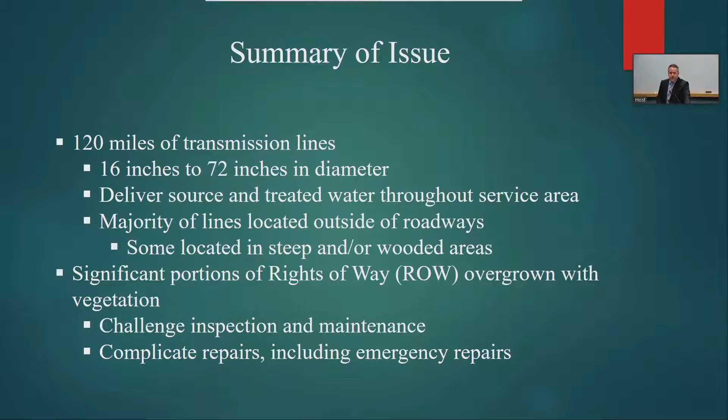Next slide please. So I kind of liken this slide to an angiogram, where you have your heart on the right and the arteries radiating out to the left. Our two east side treatment plants, Reservoir A Sly Park Water Treatment Plant, and Reservoir 1, Forebay Water Treatment Plant, are two raw water sources where our water is treated and then sent west. This is looking at our transmission lines from about the eastern boundary of our service area to about Bass Lake Road. You can see Bass Lake tanks 1 and 2 on the left. We're going to go through each one of these transmission lines, but as you can see, we cover quite a bit of terrain, elevation, and various different terrain types.

Next slide please. So I'll first introduce how we did this, and then we'll go through each one. I want to acknowledge Jan Wolf, our GIS specialist, and Rudenko, who spent a lot of hours on this. I get to just sit here and give you the summary results, and they did all the hard work. What we did was look at a 30 foot width, so 15 feet on each side of these main transmission lines, and using aerial photography and GIS analysis, we were able to look at the status of vegetation over each of these. The 30 foot is a general surrogate to the right-of-way, obviously over 120 miles, with various different types of rights-of-way. A lot of these lines were constructed by the Bureau of Reclamation, so the nature of them is a little different than our traditional right-of-ways these days. But this just gives us a good snapshot picture.

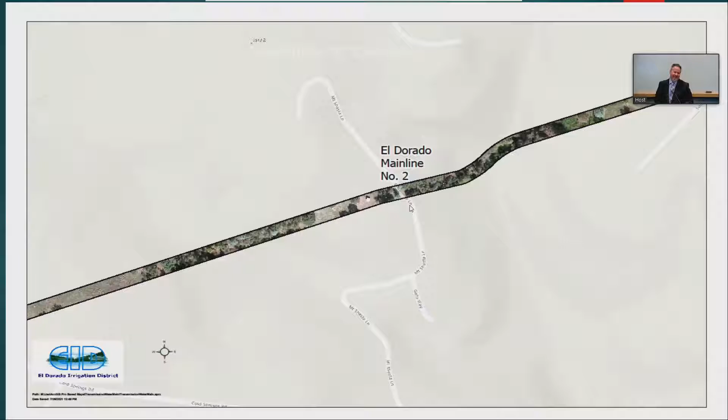So the next slide just shows the results of some of that GIS analysis. Each of these little polygons are summed up by transmission main, and we'll give you some of the acreages. This is just the best way to give us an approximate scope of work. As I said, it's going to vary parcel by parcel, but this gives us a good snapshot.

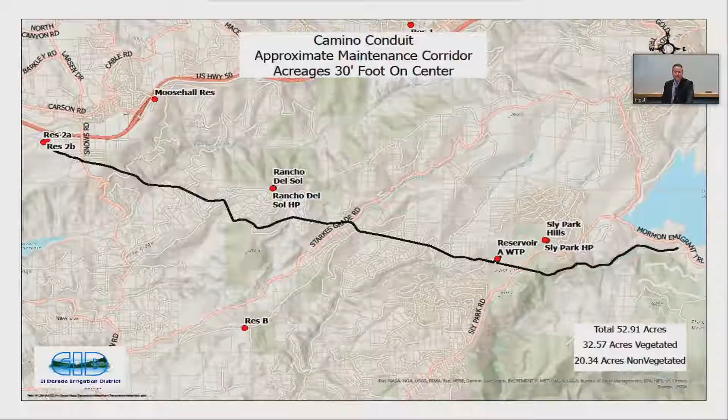Next one is the Pleasant Oak main. From Reservoir A we took water across to Reservoir 2A and 2B to bring water down the north side of Highway 50. This is how we bring treated water down the south side of Highway 50.

So again, Reservoir A water treatment plant, and then our covered reservoirs roughly following Stark's Grade, eventually into Pleasant Valley Road, down just downstream of the Sly Park Road confluence there, E16. Then Res B, Res C, and this transmission line ends at Tank 7, which is our in-conduit hydroelectric facility. We have about 77 acres, and about half of that is vegetated.

So we start to get into that transition oak woodland from the coniferous forest here.

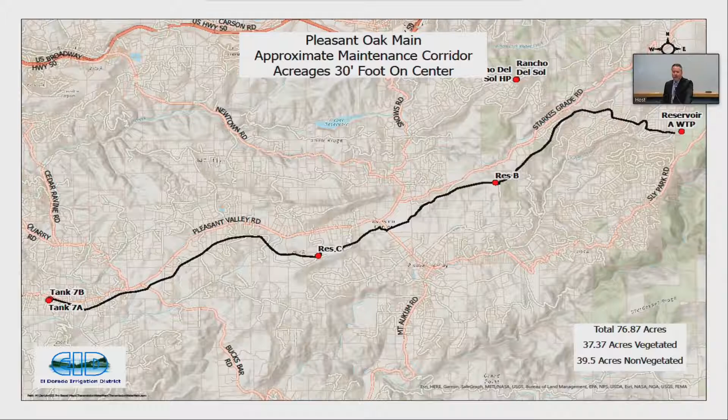And then the DSM, or Diamond Springs Main, takes water from that same tank 7A, 7B, all the way down into Cameron Park at Reservoir 12. That's there just above the Marshall Medical Facilities. We just had a maintenance project there probably about 2 weeks ago.

This is bringing water from tank 7 all the way down Pleasant Valley Road, Res 9, and then it starts to cut across Mother Lode and crosses Highway 50, Res 11 into Res 12. Res 12 is technically two of the concrete tanks there. So again we have about 85 acres here, a longer distance main, and about half of that being vegetated.

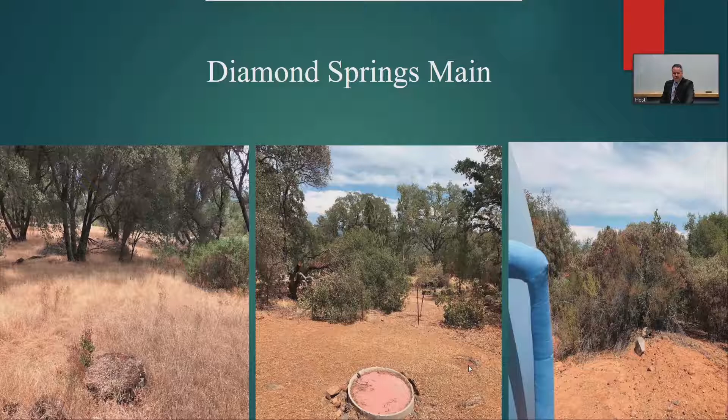There we go. You can see we're getting more into that similar kind of chaparral type habitat there. This, fortunately, is a little bit easier to maintain once you get in there, but it does kind of Hydra's head - it grows back. You cut one and 5 more oaks or manzanita grow back from it. So it's pretty labor intensive as far as return interval, but it's easy to take care of. You can see a couple of the vaults here, some of them kind of obscured by various leaf litter, etc.

Okay, now we're going to jump to the north side of the freeway from Forebay Water Treatment Plant, and this is EDM 1, El Dorado Main 1, in the upper right - Reservoir 1 Water Treatment Plant, Gilmore Road, in Pollock Pines. That line roughly follows Pony Express, Carson, and then starts to head north up towards Union Ridge and hits our numbered reservoirs, 2, 3, 4, 5, and 6 is kind of down in the middle there. Eventually it ends up at Gold Hill, and that will tie into the Gold Hill intertie.

This is also a pretty long facility, about 141 acres. Same thing, a little bit more than half is vegetated. And we say vegetated meaning vegetation needing maintenance, not just grass, obviously.

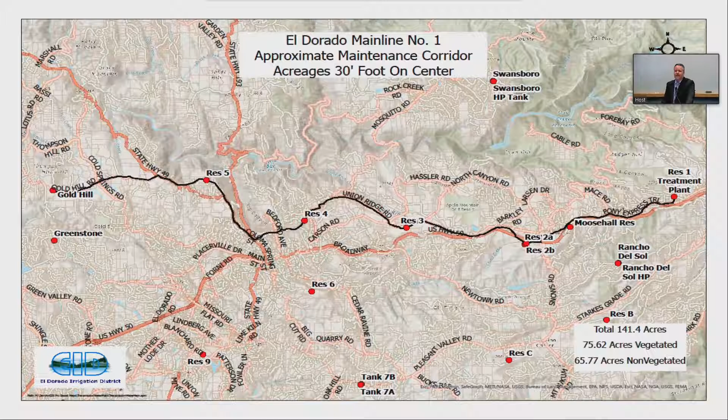And this was where we got to tour last Christmas break. Brian M. and I got to go out with some of our staff and see some of these, or at least try to see some of these facilities.

This is the project that Patrick and Kaylee presented to you, inspecting some of the air relief valves once we knew about that issue in early December with the repair, and doing a condition assessment. They were even having a hard time finding these facilities.

EDM 1 and EDM 2 kind of weave past each other, and our engineering staff are working on a process right now to look at how these facilities are run and perhaps do a little bit of reconfiguration. Interties are one of those, to help better move water east to west, where we know we have current and continuing growing demand.

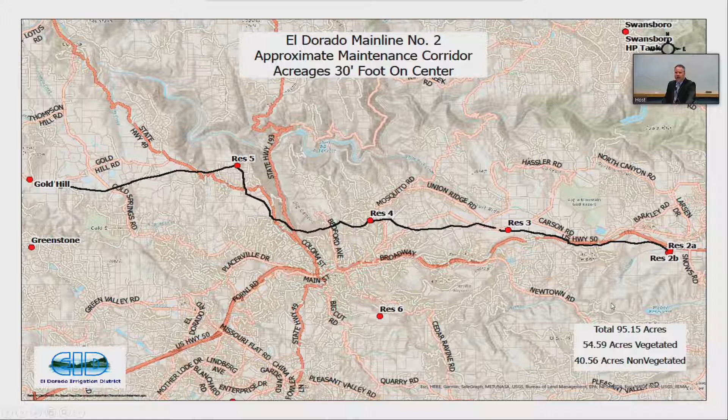This line technically begins at Res 2 at Snows Road, also terminates at the Gold Hill intertie. Same thing, about 95 acres, a little bit more than half of that being vegetated.

And then the famous Sly Park Intertie. Although it's not currently in operation, we want to maintain that and have the ability to restore it. Brian will be talking to you at our next meeting, the CIP workshop, about that project amongst many other important investments. This one's a little bit shorter line, about 35 acres and about two thirds of that vegetated.

This is kind of when you're driving up that first snow shed on Highway 50 looking to the right, that big Weber Canyon, that's really what you're looking at here. That tells you the type of work we're working through. This would move treated water back and forth. Historically, that raw water line went back into the reservoir there. At least at this point, I don't think our staff are planning to reestablish that line, now being a proposed treated water line going forward.

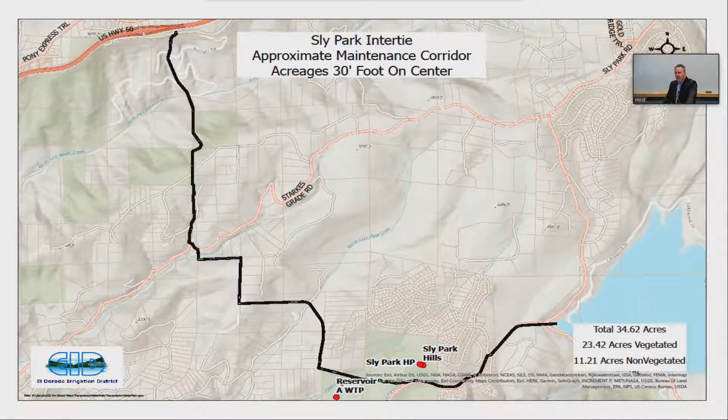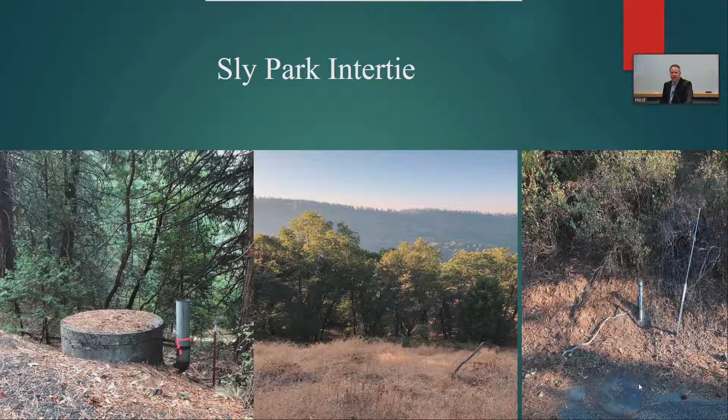We're starting to come into more of the Oak Savanna, a little bit more open area, but we are crossing a lot of chaparral on the way down.

More of the same, obviously. I think you've seen enough photos of vegetation, but it gives you a sense of the work we're evaluating right now. A lot of this stuff is more scrubby brush rather than trees. Just by way of anecdote, we similarly went downstream of Res 12 last week, working with the Bureau of Land Management, going through 12-foot tall manzanita and trying to find that line. That leak was actually found by one of our customers, just to show you how dense some of these areas are, hiking in that area.

So what's the significance of a right-of-way maintenance program? Obviously, it protects the integrity of our lines, provides routine access for inspection, and importantly, helps us access some of our maintenance needs. We have about 350 above-ground structures located all across these 120 miles, so about 3 per mile.

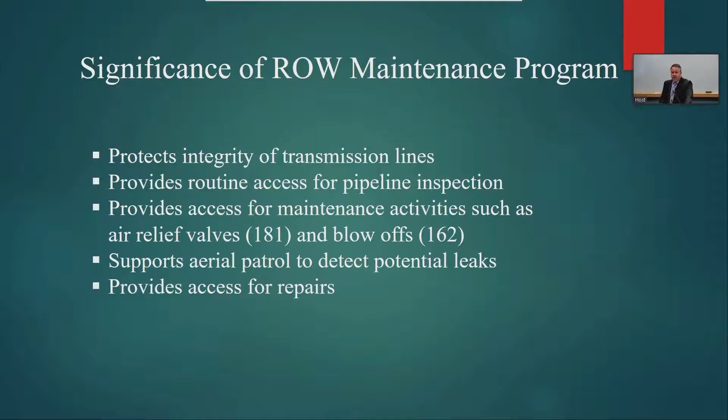Okay, next slide, please.

So we looked at two different options. The first one, similar to the way we've done some of our other vegetation maintenance or treatment contracts, is to contract that out. We looked at developing a specification for a bidding process, and we could do either one large, whole-chunk multi-year project, or potentially smaller, more distinct segments by transmission main or by milepost.

One of the drawbacks that really swung the pendulum for our thoughts and recommendations is working in people's backyards. Is that really what we want to have contractors do? Especially when we're working through prescriptive easements, trying to develop and maintain a long-term relationship with our customers. And when you have contractors that aren't familiar, and we've got 350 very important facilities sitting above, the last thing we want to do is damage one of these lines. That would be catastrophic. Air relief valves and blow-offs are the two types of appurtenance there.

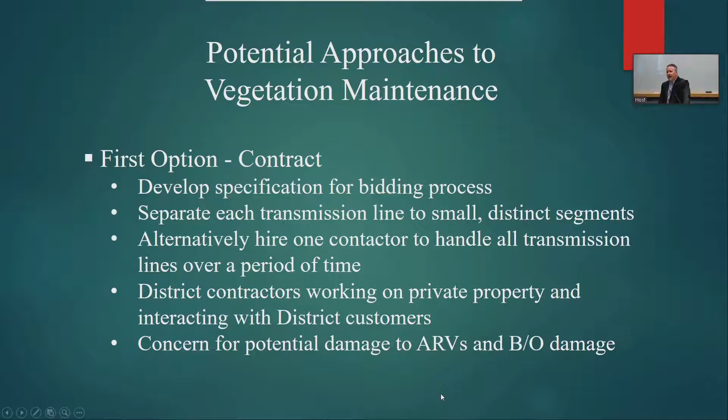Okay, next slide please. So the other option would be, should we try to do this in-house? We looked at our existing staff resources, and obviously, from the field staff standpoint, with our existing maintenance needs, we just honestly don't have the ability—that's why you see what you see out there right now.

So if we were to do that, we would need additional trained, skilled staff. Most often you see a 3-person crew, just for workflow of trimming the vegetation and getting it into the chipper, et cetera. Then we would need to look at the appropriate equipment—we've done some specifications for the types of equipment necessary to determine a cost investment. And honestly, right now, recruiting for skilled labor is a very challenging environment.

We're up against PG&E, and you see those vehicles everywhere. Last year, I had a crew from Florida working for PG&E in my front yard trimming, so that kind of shows you the market right now.

Next slide please. So our recommended approach, and we wanted to get your feedback to get direction on how to proceed with tackling this issue, is to really develop a comprehensive program and try to get us back on the right track, managed by district staff. We would have direct interaction with customers, right-of-way entry agreements, potentially a more formal easement, and regular visitation, whether every 3 to 5 years. It's really going to depend on the type of vegetation and our frequency of returning, with the goal of being able to access and maintain these lines.

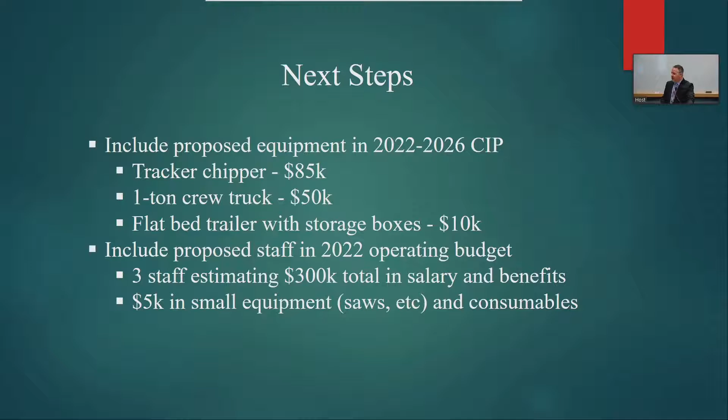Okay, next slide, please. So I also want to just talk, obviously our main objective is maintaining our lines.

We started working on this before the unfortunate events a couple months ago, so unfortunately it just reinforces this: vegetation maintenance on our rights-of-way does provide some community wildfire safety benefit. Whenever we talk with firefighters, and we have one here today, they talk about the 3 R's: ridges, roads, and rights-of-way. Those are 3 locations where hopefully they're able to stop a fire. So if we can help in any regard, we would want that to be the case.

When we had that fire up here a couple months ago, they were actually bulldozing right over the EDM1, and Rodenko was watching the SCADA, hoping they didn't damage it. It's not a great feeling, so to the extent that we can decrease the likelihood of damage to one of these important arteries, the better off we are.

We also want to hit some other areas on the list that aren't as high priority. We have some large distribution mains - that one at Res 12 technically isn't a transmission main, but it's a really important cross-country distribution main. Project 184 facilities we know all too well about now, as well as Sly Park, continuing the great work we've been doing for almost 4 decades.

So, and I think that's it. Yep, that's it. Director Osborne: You partially answered a question - a 3-person crew, you think is sufficient to do that? Yes.

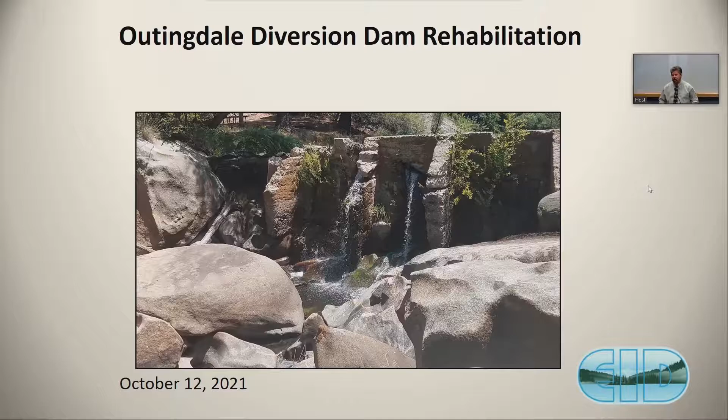Next, please. We look at the summary of issues: the extreme drought conditions and the drying of the Middle Fork Cosumnes River gave us an opportunity to enter the normally flowing river channel and conduct a detailed inspection of the dam. The inspection revealed significant damage and deterioration had occurred, warranting emergency rehabilitation. The purpose was to prevent catastrophic failure and to maintain our essential water service to the Outingdale community. The board had declared an emergency regarding the dam, allowing for expedited emergency restoration. I believe it was the August 9th board meeting, and the work was completed on September 30th.

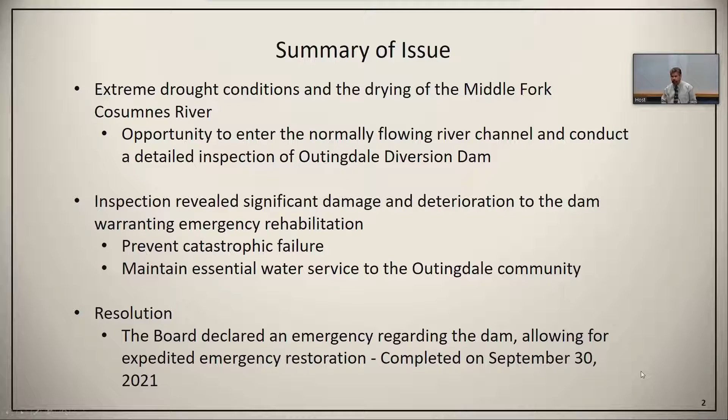Just to reorient ourselves as we talk about some of the sections, looking upstream here, we basically go in ascending order from 1 to 7 — 1 being the far left abutment, with sections divided by the buttress walls all the way over to the spillway section, section 6, and then the right abutment, section 7.

Looking back at what we started with, you see the buttress wall here beginning to be undermined and significantly deteriorated. You see a section from section 2 of the dam hanging by just a thread of cable, since cut loose. You also see the sandbags — we no longer rely on sandbags for the structure, so that's an improvement.

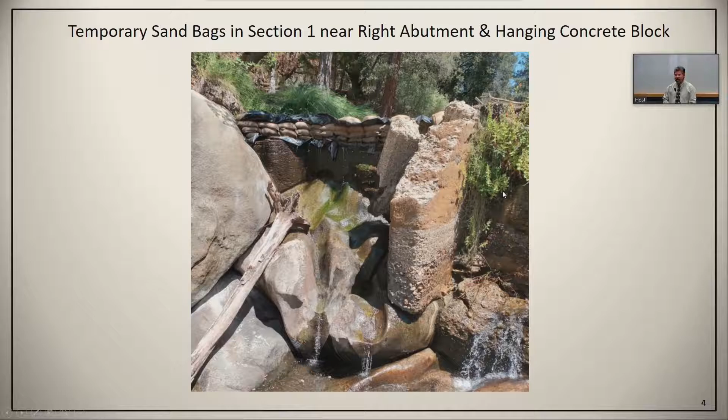If we look at section 1, you see significant voids and water pouring through the dam. Those are openings, and they looked even larger once we got the debris and vegetation cleared away — definitely through-holes that were leading to uncontrolled water.

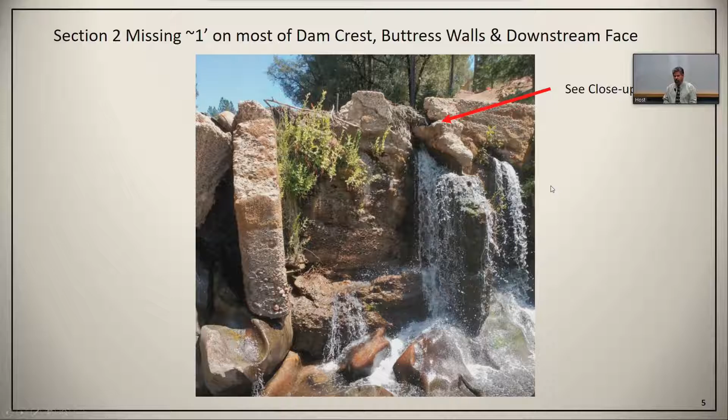Looking closely at that section, you can see not only the breakage and loss of structure on the crest, but also a large opening completely through it, and some of the limited reinforcing steel — the vertical bar by the red arrow — within the buttress wall. Part of the assessment's observations was the limited reinforcing steel that could maintain the structure for any duration going forward. Looking at the buttress walls, we saw voids underneath, loss of sections, significant erosion of the concrete itself — it was just not long for this world.

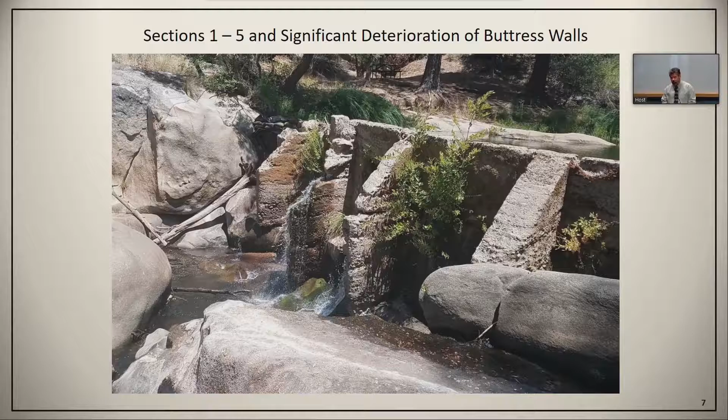But recall that the buttress walls are what hold up the structure — that's the main support. Without those intact, it was very concerning in terms of how this dam would carry forward in its previous condition. We also looked at the openings and voids underneath the buttress walls.

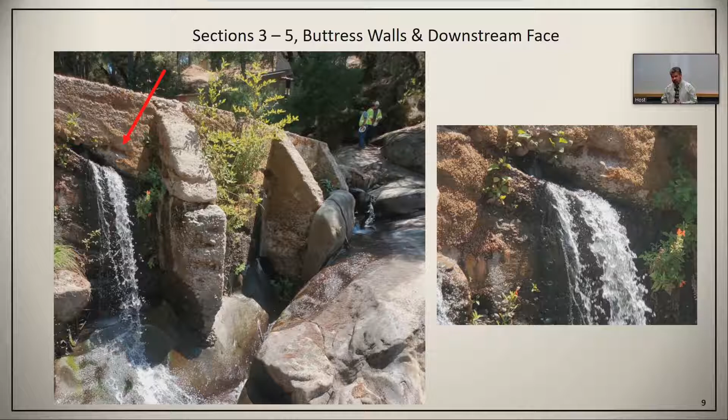Looking at sections 3 through 5, you see more through cracks and significant loss of concrete. We found very minimal reinforcing steel to hold these pieces together, which over time caused separation at cold joints.

The buttress wall on the right, or far left in dam reference, was significantly deteriorated, and the left section of the dam was made up by sandbags. We're also looking at the flashboard section with the boards in place.

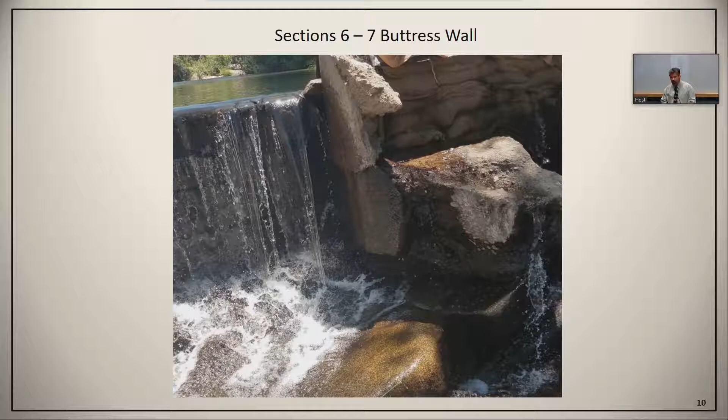Here's a view from farther downstream showing the extent of the previous condition. The upstream face was just as telling as the downstream, with significant loss, erosion, and ramming — loss of concrete from trees that had come down, I believe under flood conditions, leading to serious damage to the structure and loss of its integrity.

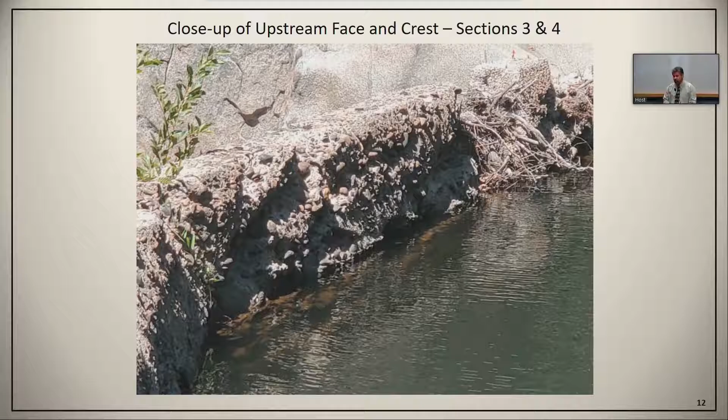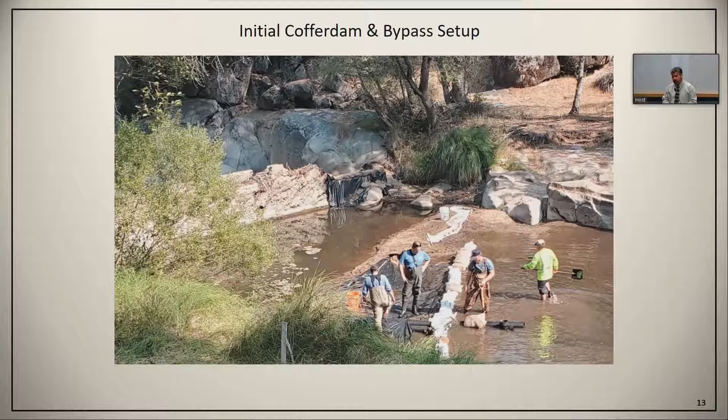As we transition to the fix, the initial setup was installing a cofferdam and bypass system so we could dewater the dam itself. This is the dam dewatered, as you see to the right, with the bypass system functioning to keep up with it.

You see the condition of the concrete on the upstream face now that it's been cleaned — not any more comforting than the previous views, and badly needing help. You also see the line we cut dividing the old from the new; we built the new reinforced section in that upper half of the wall. The previous repairs from the 2014-2015 era were holding up pretty well on the lower section, so our focus was the upstream wall — the structure is also thicker toward the base, which was comforting. We didn't want to dewater and remove a lot of sand, and since our construction time could be limited, we didn't want to take on more than absolutely necessary, while still making the structure good for decades to come.

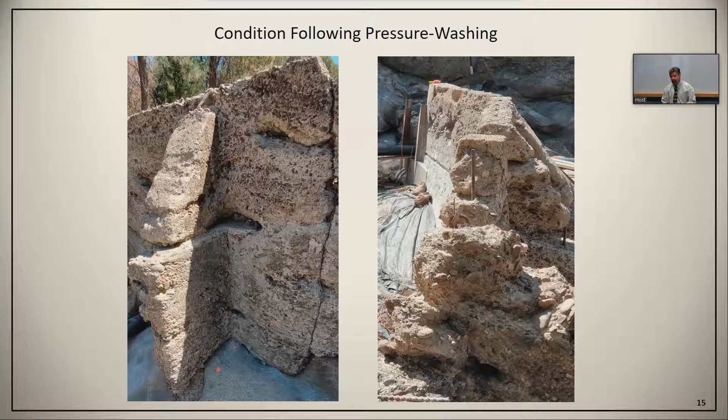The guy had the most incredible attitude working throughout the project, and hats off to him for all of his contributions, but the whole crew, in fact.

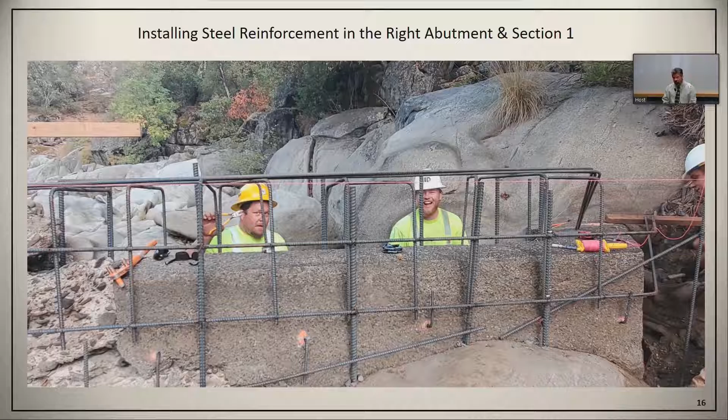But you see the reinforcing steel, the larger number 8 bar, 1 inch, going vertical, and the smaller number 5/8 running around it. You see that the number 8s are doweled into the structure as planned.

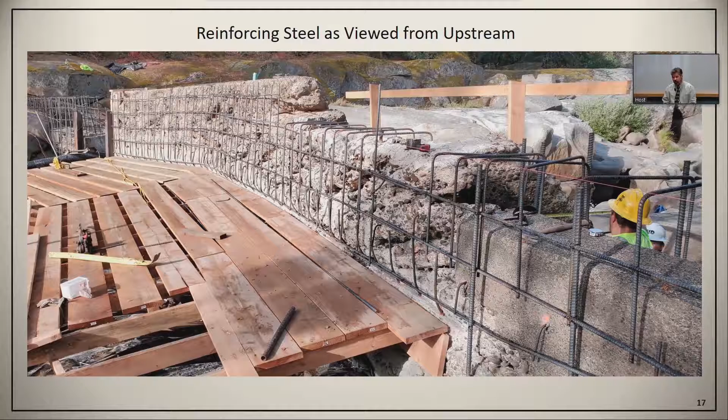Here's a view looking from right to left at the upstream. So this was the plan to establish a grid of steel mat to basically hold the concrete in place and also to reinforce it from the battering of future trees' impact.

And this platform set up for access on the pond side, the upstream side.

How old was this dam? About 100 years. So it's been 100 years since it's had any really good reinforcement.

We had done some repairs. You see the concrete on the right? That was, I believe, from 2005.

It looked like from some of the concrete that had broke off on the crest, that was a subsequent repair that probably preceded the district's involvement with the project.

But again, the lack of steel reinforcing to kind of tie everything together and give it the longevity it needed, and the ability to withstand that kind of battering over time, it really was lacking.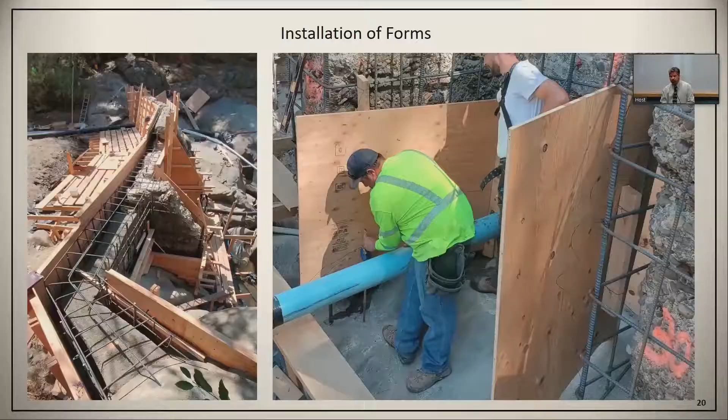Here you see some of the form work. This is Jeremy and Devin, left and right. Jeremy was thinking about how to get the boards to follow the contours of these unusually shaped rocks.

He had an epiphany one morning about 2 in the morning before he took this on, and he basically developed a method to draw a scribe on the form board.

On the lower portion of the form board, by running his ruler vertically up and down over that face, that contour, and basically drawing with a pen the contour up on the form board.

And it worked out beautifully, it was a great fit. So hats off to these guys for their ingenuity, their inventiveness to adapt to some really difficult conditions.

I just wanted to say that's very admirable, because this is a one-off. This is not something you can just draw on the CAD and say, oh, go do this. This has to be done in the field, because everything is unique.

That's absolutely right. Very, I mean, just watching all this, very impressive. And all the more challenging for these guys to adapt to typical form work where you pour a slab and stand up square, rectangular walls. This is not that.

The view on the left there shows more of the form boards in place, just a view of how that was coming together.

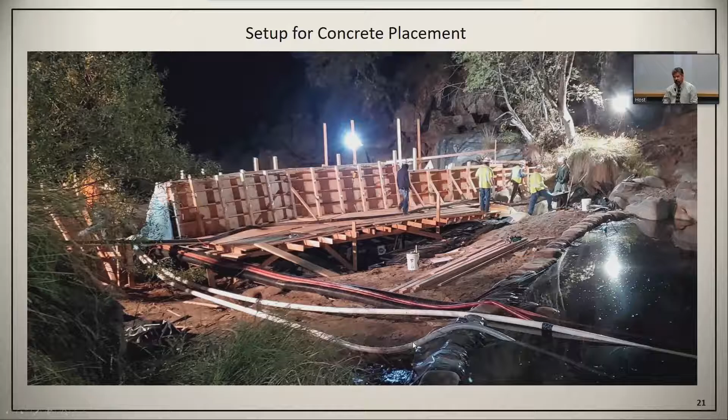And we had a full moon that night, so that helped with the lighting conditions too. Yes.

And this is Devin smiling at us. He's actually Justine's husband and was part of the water division that was able to help us out on Barrow. And so you can see the concrete beginning to fill the forms on that far side.

So as you see, we're working our way from right to left and also filling the buttress walls as we go. You can see the concrete, the yellow-handled device is a vibratory wand that helps eliminate any voids in the concrete and give us a real tight fill around the irregular shaped concrete that we're pouring against, as well as around the reinforcing steel.

You can also see on the upstream side, that edge is the angle iron with the lugs on it, just below the top of the board, and back closer to the pumper on the upstream side.

If you can see a piece of angle iron there with lugs coming towards us, that's part of the new reinforcement to give us additional endurance against impact from floating trees.

So here, more concrete being placed and vibrated and placed and finished.

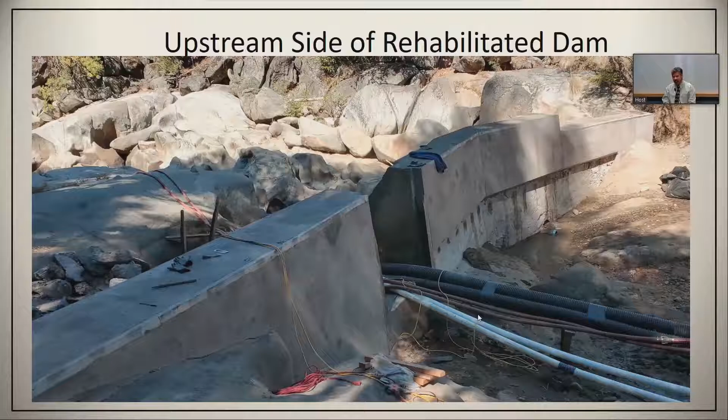So the finished product, the upstream face, you can see that finish line going across to the right of the flash of the spillway of old versus new. And we did complete some additional patching on that upstream face to the extent that took care of everything that needed attention at this point.

And you can see that the top upstream edge of the crest, that reinforcing steel now provides additional endurance for the dam from impact.

You can also see we have a step-down section on the far right, which is kind of the auxiliary spillway. So should we be caught with incoming flood where we have our flashboards in place and we're not able to remove those before the flood arrives, the design is for that right section to overflow and spill, and then allow us to have access on the left side here in the near ground and still pull the boards.

And we have prepared some new flashboards for the water division, made up of 4x6 by 7 foot long, made up with pins and also a fork, so that from that crest you can reach over and reach down and pull the boards, even when there's an overpour condition going on. And there will be a hand railing installed on the downstream side with sleeves that's removable during flood conditions, so that we have the safety of access to tie off or hold on to during that kind of work.

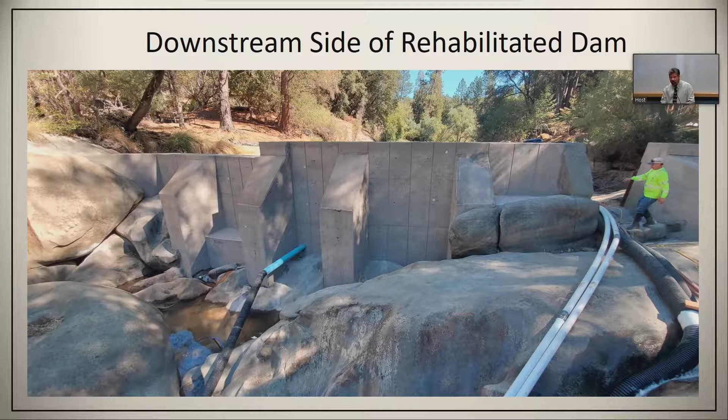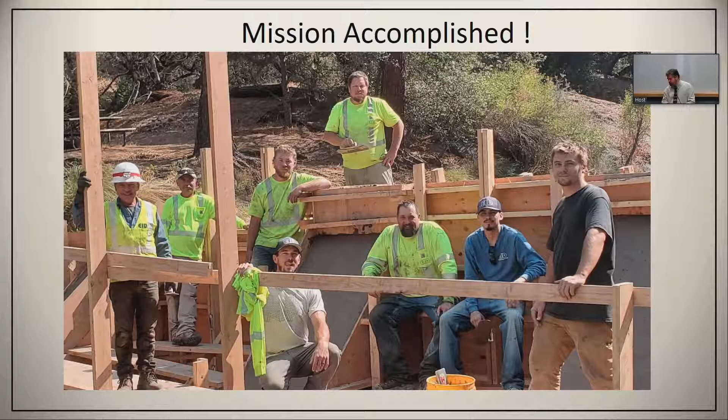But I also want to say that this was a whole district effort. Water Division, Collections, Hydro, all provided the staff to do this work and bring the best of the ideas together and skills. And we're just pleased to have this quality of crew. We had finances help with getting the project set up, with getting our materials procured on time without causing any delay in the field. We had help from the shop, the fabricators, when it came to getting our steel cut and those lugs put on for the angle pieces. We had help from legal and our right-of-way folks in terms of getting our access agreement together at the front end of the project so we could get on the site, and just on and on. So just pleased to be a part of that, and thank you for your support.

Great job, John. And this was at the, I think in the middle of the Caldor fire heading over the hill. We had crews dispersed here to get this work done before the rain started hitting.

Okay, thank you. Other board comments? Very good. What was the total time from start to finish? It was about 5 weeks, from the time we started dewatering to the time that we completed the work in the field.

Well, what a testimony to our staff. I think we should have a plaque put on the face of the dam that says, you took ownership of it, you did it, you engineered it, the team fabricated it. So I think we really should have something to memorialize that effort.

Well, it's very much a we effort. I think they got to put their handprints in it. Too late. It was fast drying, Con. Yeah, Grandpappy told me he put his book there 100 years ago. Well, I accidentally left a paw print there too, but I fixed it.

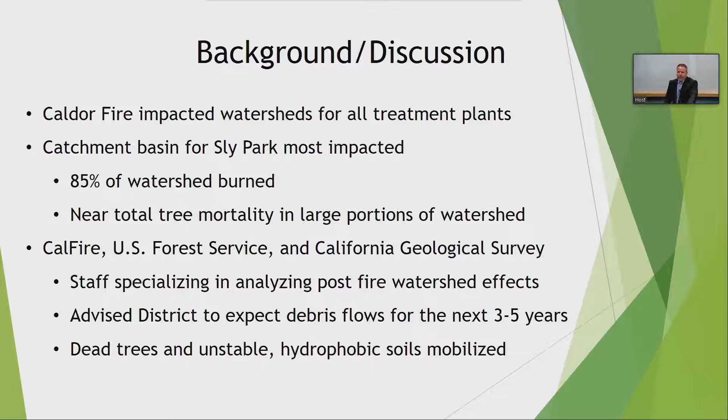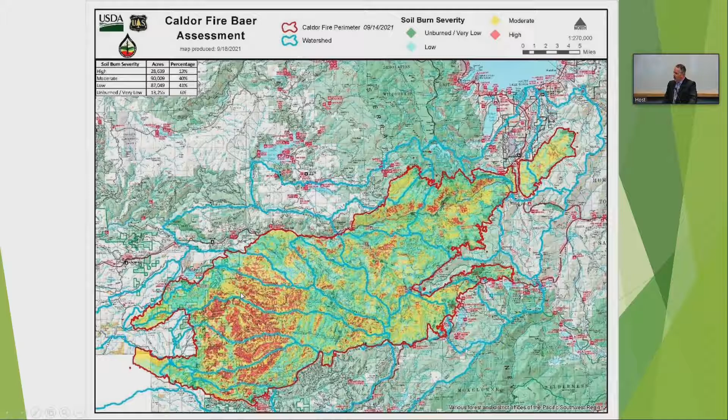Okay, so now we'll just zoom in here. It gives a little bit better orientation. You can see Jenkinson Lake in the upper left, Grizzly Flats down there in the middle there. And then for orientation, the highest burn severity—if you head on North-South Road, Capps Crossing, if you have the opportunity to drive through the watershed there. So the fire moved in a northeasterly progression, north-northeast.

So as you first leave Sly Park, and actually at Sly Park itself, because of our prior efforts, and some of it just complete honestly this spring, very, very low intensity—because that's where the backfire was started from the reservoir back away to stay the lower portions of the watershed, until you get to about Benetti Road and you start to kind of wind up that ridge.

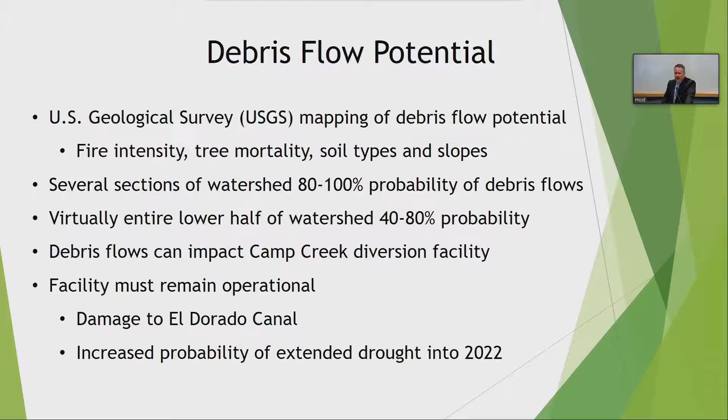And importantly, those debris flows can impact our diversion facility. We have to maintain that facility as operational, because of the damage to the canal, and Brian M. and his staff are working as expeditiously as possible to get that restored. But we realize this is our main artery right now, and there's increased probability of extended drought into next year, so we cannot afford to not divert water.

So this is just a quick snapshot of that model. The last polygons I was showing was the boundary of the watershed. These little black dots are points along the rivers. Go slowly - these dots here are all the little tributaries coming into the Camp Creek watershed.

As you can see, basically the whole lower half of the watershed is 40% or greater, and there are some areas, these little dark reds, at 80 to 100% probability. So because of the steepness of the slope and the intensity of the burn, there's very high likelihood in the lower half.

So we developed a response plan to deal with that. What we do - we do get trees coming through, that's not uncommon in wet years, but these are orders of magnitude different. Rather than one or two, it's hundreds, thousands - we don't know yet what we expect to come through.

So what we plan to do is stage an excavator at that facility. I think most board members have had the opportunity to visit that facility, to keep the debris flows off that diversion and maintain the ability to continue to divert water.

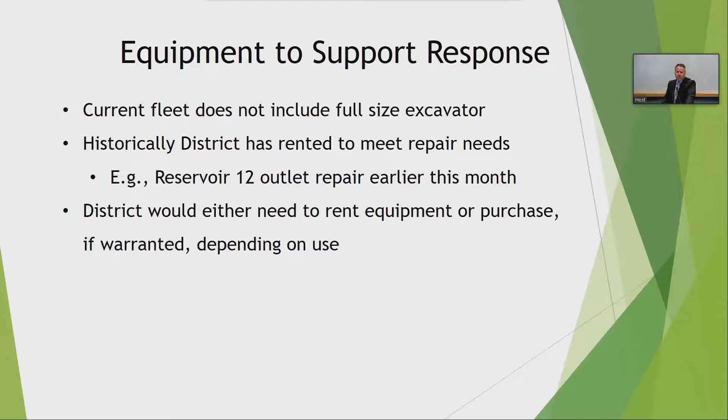So we looked at rental needs. We actually first started there, and unfortunately there's not the right size equipment even today available, and that's just because the construction market right now is obviously very difficult. We did find one that would probably work, a little smaller because we need to reach out to get the trees off. So this one's a little undersized, but it's about $6,500 a month.

And obviously that type of equipment, once you let it go, you hold on to it because you don't know if you're going to get it back. So assuming we need it for the full six months, we'd spend around $40,000 over the course of the winter. And then looking at the analysis from our partners, assuming five years, we're approaching $200,000 in rental costs just for that project alone.

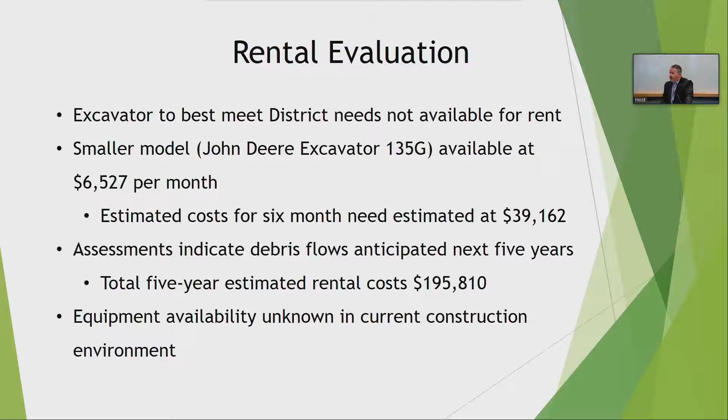And we just don't know what the availability would be. So obviously we would want to rent it as early as we can and keep it for the winter just to make sure it's available to us.

Yeah. So it just shows you how we're dealing with the competitiveness of equipment, unfortunately, right now.

In this case, historically, we might not actually need the opposable thumb because we're usually digging. But in this case, sort of a little bit of add-on, we would have a thumb to move those trees. So we'd add 2 different buckets depending upon the use for our field staff in the future. Fortunately, we do actually have 3 different trailers, so we wouldn't need any trailer to transport this.

So that does include freight from the East Coast down to Sacramento or Rancho - Greg, I can't remember down that area.

Don't, as a public utility or as a government agency, aren't we exempt? No, we're not. I've been arguing about this for years, haven't I, Alan? Did it change? Because I thought at one time we were exempt. All right, crazy. Yeah, are you referring to sales tax or? Yeah, we're not exempt from sales tax. There are certain exemptions from property taxes, for example, but I'm not sure. Okay, yeah, it's not like being a wholesaler.

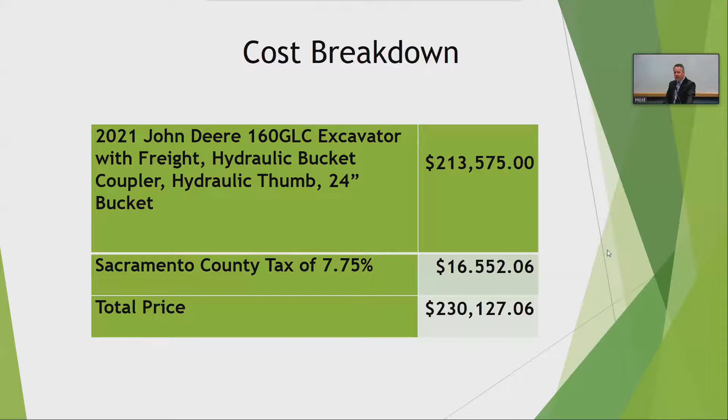There we go. Okay, so our recommended approach, and I promise I won't touch that anymore, for the reasons we described, we think it makes better business sense for the district to go ahead and propose to purchase this. We obviously have a demonstrated need for the Camp Creek Tunnel. I'm hoping, honestly, we don't need as much as our experts have advised us, but we can't be wrong - that's simple fact. And we clearly have a need for ongoing repairs and even installation projects of larger distribution lines.

And then we do use excavators for doing culverts and other work up on Project 184 as well. The rental availability right now is obviously pretty volatile, and we need to make sure our equipment will be ready when we need it. Any delay in getting the equipment out there is going to reduce the amount of water that's available for us. So we just think it's most economic for the district's overall needs.

This is a 20 to 25 year piece of equipment, I think Jason was saying something like that - a 20-year piece of equipment. So this is a long-term investment we're asking the board to make. Next slide, please.

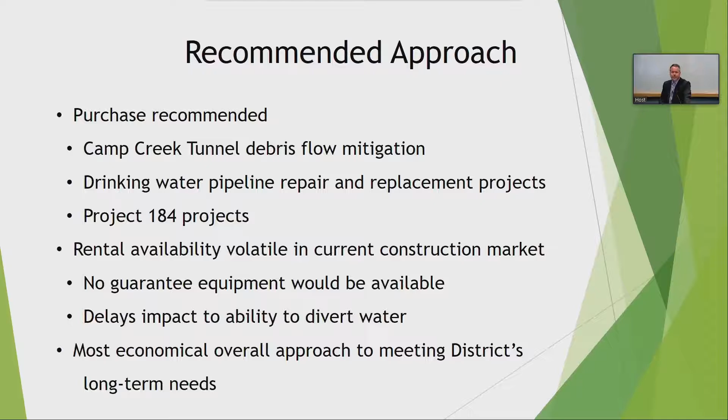As I described, the proposed procurement would be, and we attached that to your board packet, the piggyback, and that's allowed per district administrative regulation. It gives obviously a very good value, and we're not having to endure that time and effort for bidding.

Okay, next slide, please. And the funding would come from the district's operation budget. It would be capitalized on the back end, but it would come from the drinking water budget this year.

So option one is to award a contract to Pape Machinery in the not to exceed amount of $230,127.06 for the purchase of one 2021 John Deere 160 GLC excavator. Option two, take other action. The recommendation is option one.

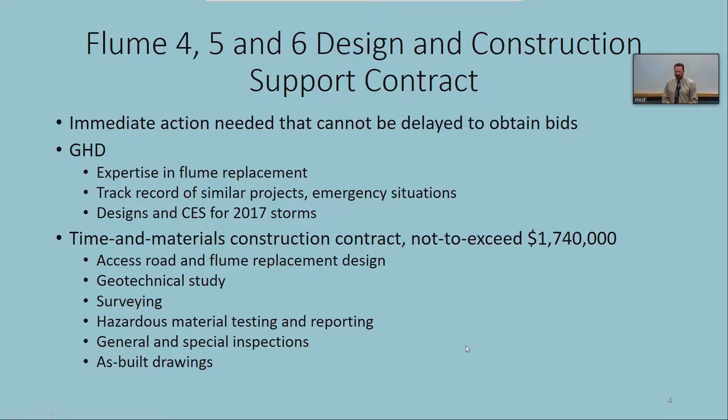As far as the funding request today, if you recall, the board approved a $17 million contract with Syblon Reid last time, which included funding for that contract. Since that funding is essentially burdened with the Syblon Reid contract, we do need additional funding for design, capitalized labor, and related contracts like stormwater prevention monitoring - also possibly some drone services we need. So our funding request would be to fund the GHD design contract, plus additional capitalized labor and other contracts of about $600,000, for a total funding request of $2.34 million.

So that is the contract, and we'll get into the other 2 a little bit later. At this point, I'd like to have Carrie Mutchler come up and talk about the status of Flume 4, 5, and 6. Carrie's been doing a great job. About a couple months ago, he thought he was just managing one flume replacement project - that was supposed to be just designing some roads - but now he's managing really 4 complete replacement projects with the order to get it done ASAP. So Carrie, come up and talk about 4, 5, and 6.

Yeah, really. And then after Carrie, I'll have Brian Deason - Brian and his staff are doing a great job with the hazard tree falling efforts as well, so he'll talk about that, and then I'll wrap it up.

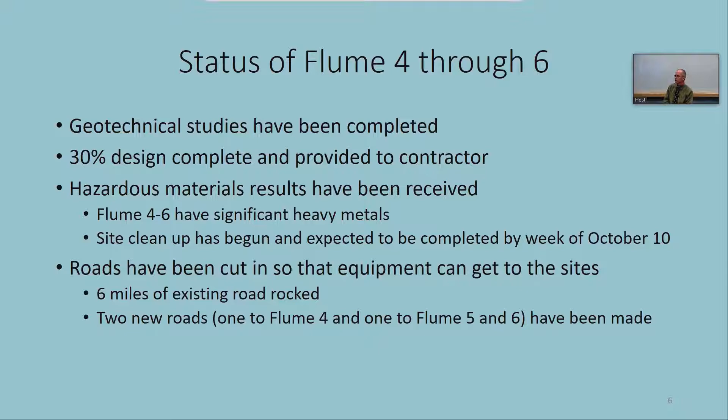We have got all the roads cut in for Flumes 4, 5, and 6. That was mostly roads, and I'll be going through some slides here in a little bit. Most of that stuff was in place, but there were two roads—one going to 4, one going to 5 and 6—that were a few thousand feet long that we had to cut in, and we did work with the Forest Service and SPI to be able to get those in.

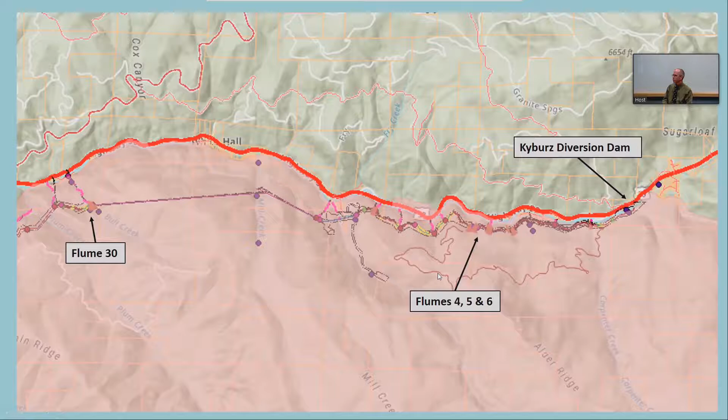Next slide. So this is just a brief overview of what we're working with. Flume 30 sitting over here, and then 4, 5, and 6 all on the road. This brown line is our access road—part of it is Forest Service, part of it is SPI, and then, of course, Kyburz right there, our diversion facility.

I don't know if it's showing up in the picture. Oh, there it is. Yeah, that's where those guys are standing, that was the existing access road. It had grown over, but that's the one we have restored. Again, 6 miles long, on U.S. Forest Service and Sierra Pacific Industries property.

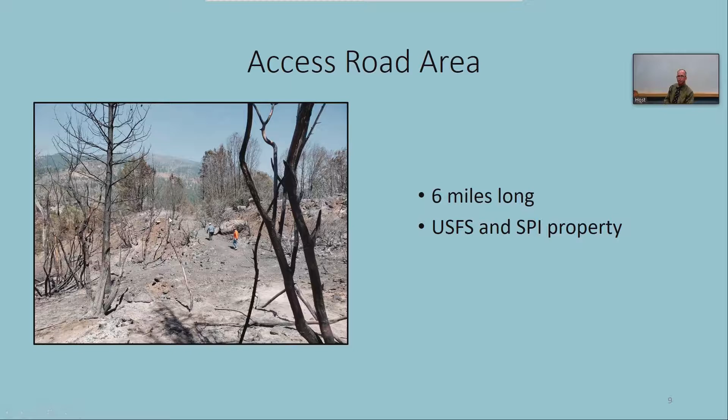Next slide. This is what it looks like now. This is the machinery we use to get the road bladed in, and we've got a nice access road right now. We put a bare minimum amount of rock on this just to get everything in. If weather develops, we may have to put a little bit more in, but we're trying not to build a highway. We're just trying to get access, get the stuff built, and then get out.

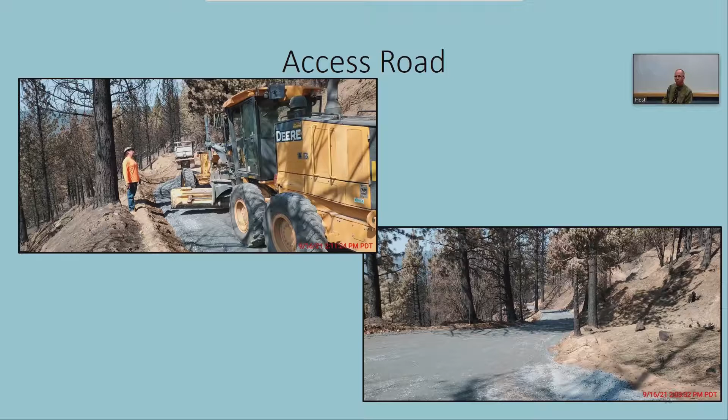This is Flume 4, this is the cut into the new access road into 4. This road is only going to be used to get certain equipment in. The plan is we can't get concrete trucks in here, it's too steep. We're looking at somewhere between 25% and 38% grades through here. But we are within the distance of getting concrete slick lines in. We can be within 2,000 feet, we're 800 feet away, so we can pump concrete down to this site now.

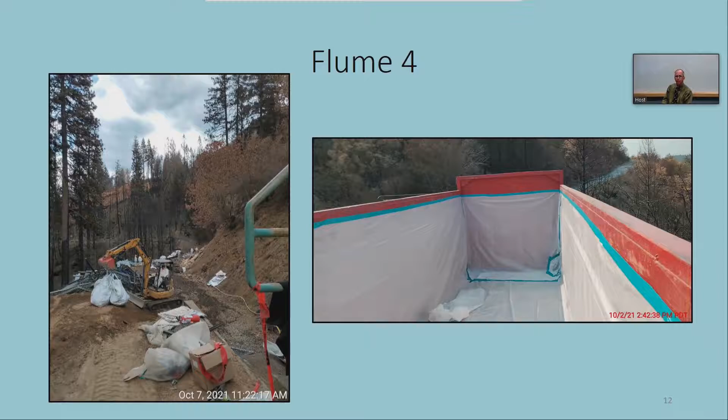This is an example of the hazardous waste. Like I was saying, they bag it all up, put it into these big bins, and then we haul the bins to the facilities. This is standard for all the sites, but this is what Flume 4 was looking like on the 7th, just about 5 days ago. You can see that they've cleared away a lot of that and are getting ready to go.

Flumes 5 and 6, pictures on the side from right after the burn. Again, just a few days ago, 5 on the left, 6 on the right. Everything is either bagged and cleaned and getting ready to move in and start the actual construction process.

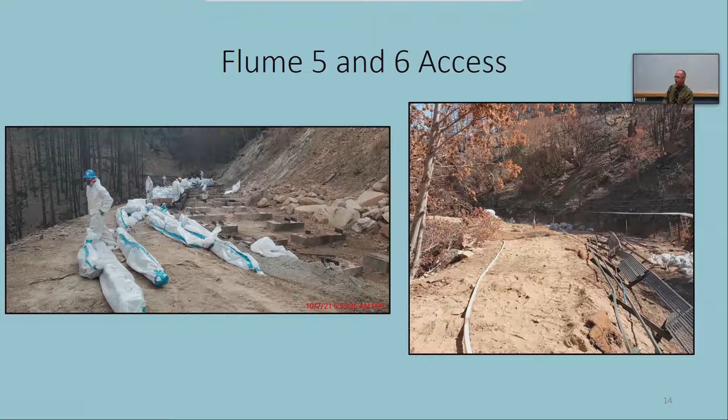There are some pictures that are missing from ours. Yes, I updated this morning. Okay. Yeah, alright, get the... it will be up online, though.

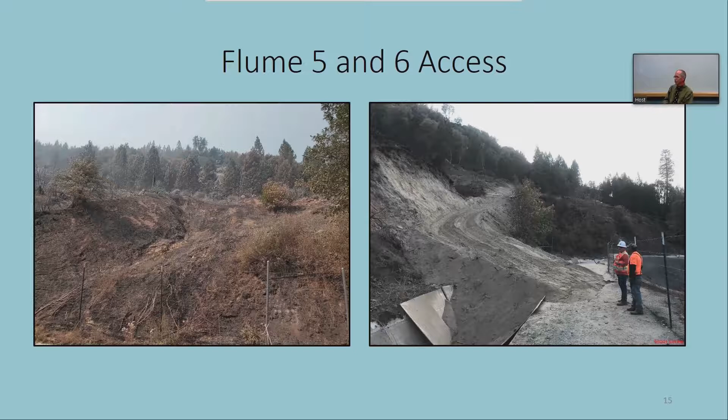So for the access roads, this right here was the access road we used during the 2017 storm event. We put stuff in here to get erosion control protection. That ridge is right over here, this same ridge, so that's what got us into Flumes 5 and 6. We just filled up the canal, as you can see, with the wood, to protect what we had in place. We filled it up with dirt, and now we're able to get equipment around and through. This one, we may actually even be able to get concrete trucks in. This one's not as steep, it's only looking at about 15%, which is about the max that they can do.

So the upcoming work: we'll finish the hazmat removal, we'll get started with the MSE wall construction. We have a borrow site already located, we've got to move about 8,000 yards. The MSE walls are going to be between 3 and 20-plus feet. We shoot the new canal sections and we flow the water. It's pretty simple.

What's that? It's real easy, yeah, right? That's what he keeps telling me, so.

Alright, water update is about... we are shooting for mid-December. We have a couple options that we will be discussing later, but that is what we're shooting for, mid-December. And for the board, every time I see Carrie I ask that question, so don't feel bad. Does that include Flume 30? Yes it does. Wow, yeah, at this point, yeah. We've reworked all of Flume 30 from the design to help expedite some of that work. With the hazard or emergency declaration, that helped with a number of things to get us in a little early. But the latest schedule I've gotten from SRC shows about mid-December for that one as well. Great, thank you.

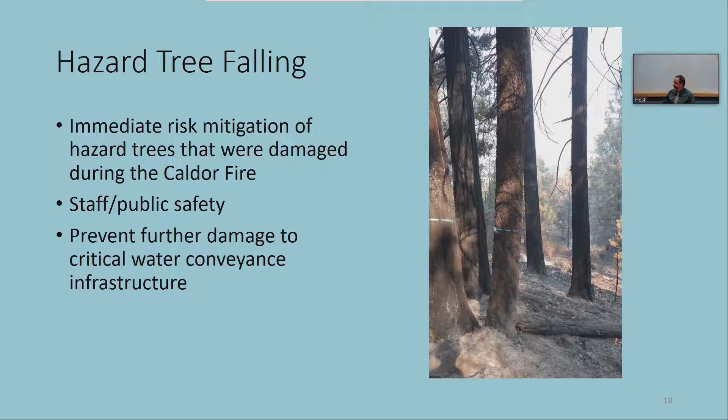So what do we do to address this risk? The district has contracted with registered professional foresters who are conducting surveys along the canal. We're focusing our initial efforts along the El Dorado Canal, approximately 5 miles between the diversion dam and flumes 39 and 40. But there are other areas of the district where we'll also be looking at hazard tree removal.

So this is a pretty large task, so we're dividing the work up into segments, and we are releasing a series of requests for bids to help implement this work. Next slide.

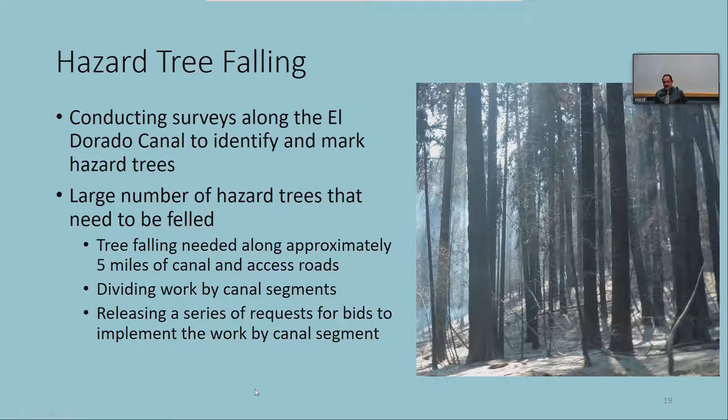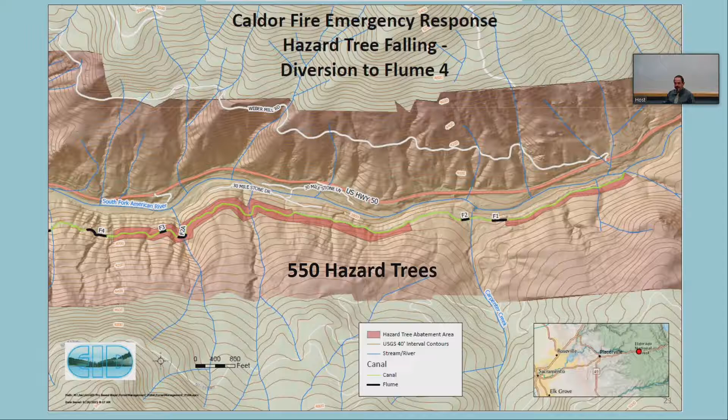So we issued an RFB in mid-September for the hazard tree falling in this segment. We had a good turnout in terms of bids - 13 contractors attended an optional site visit to walk the length of the treatment areas. From those 13, we received 10 bids. There's quite a range in the bids we received, from roughly 110,000 to 1.2 million. I think this is just indicative of the demand for these services right now.

So we did determine that Left Coast Land Clearing was the lowest responsive and responsible bidder.

We had our third-party independent review done by our registered professional foresters, who agreed that their bid was reasonable and that they could perform the work. They're based out of Sonora and have done hazard tree removal for Tuolumne County, Tuolumne Utilities District, and even the El Dorado Resource Conservation District.

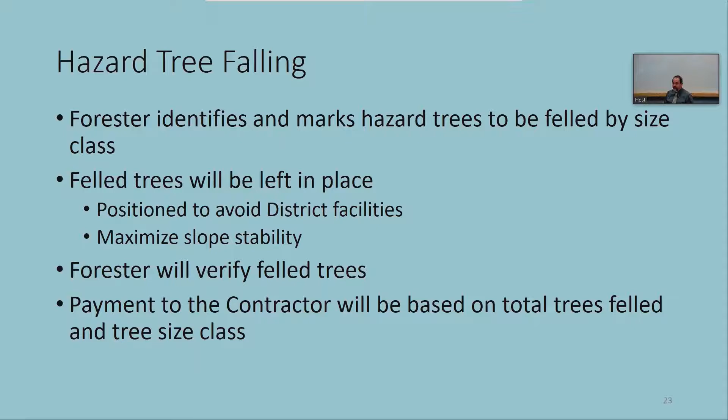This is the first contract that we're asking to award. We currently have a second one out for bid, which sealed bids are due on the 15th. And then we'll be issuing a subsequent RFB in the coming weeks for these various segments.

Thank you. Oh, I'm sorry, just one last thing. I wanted to mention that when we get to the option table, you'll find that we're recommending option 2. The only difference there is that we're asking the board to approve this contract as opposed to ratifying it. We had thought we'd have it in place late last week. We're still finalizing submittals and will likely have that contract ready to sign today or tomorrow. The contractor is prepared to start work this week.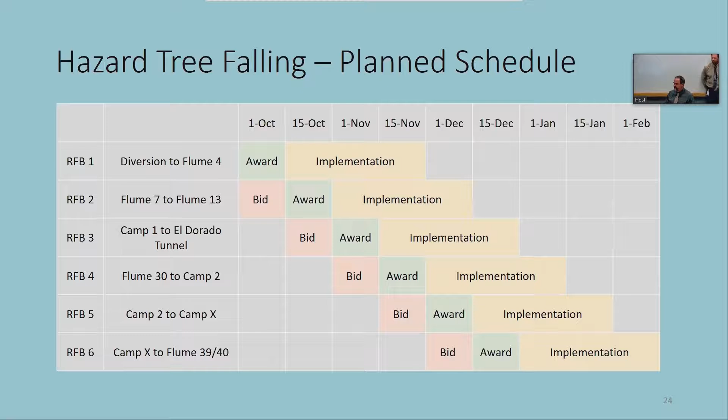I'll be curious to see with the subsequent bids, because now that the first one is done and that's public information, how that affects the subsequent bids. Do the low bidders think, well, I should have put a little more in, and the high bidders think, okay, I'll bring it down a little bit. Hopefully it's a little more compact.

Yes, but just a footnote to that, as these contracts are bid out and we have the bids, I plan to authorize those and bring them back to the board for ratification, so there's no delays. Thank you very much.

All right, thank you. So the third contract is a ratification for FEMA consulting services. This is a contract that Jim signed with a company called Aptim Environmental & Infrastructure. It was a cost of $150,000 not to exceed, and the contract was for a 60-day time period to allow us time to solicit proposals for more long-term assistance. FEMA guidelines allow a 60-day initial contract, but in order to be reimbursed for the full amount, we would go out with a subsequent RFP for a longer-term contract.

So the scope of services would be consulting, policy guidance, and program management for potential funding and reimbursements under three primary areas: the FEMA Public Assistance Program, the FEMA Hazard Mitigation Assistance Program, and the state California Disaster Assistance funding potential via the state board. So we're asking the board to ratify that initial contract of $150,000, and staff will be coming back in November for a longer-term contract award to help us navigate through the FEMA process with this fire.

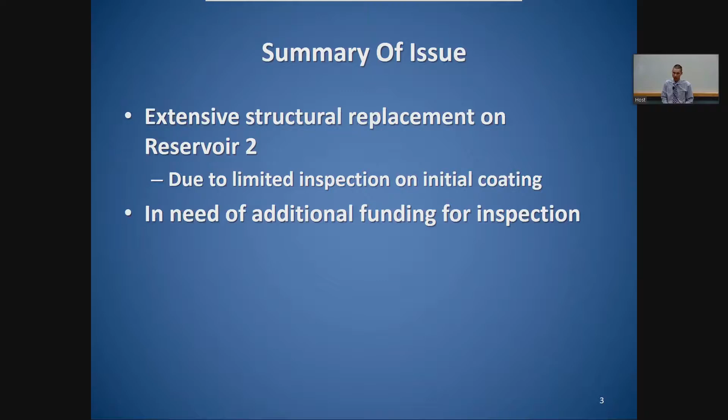So with the completion of Reservoir 2A and moving into Reservoir 2, there was extensive structural replacement that was found, which we'll get into in a little bit, as you can see in front of you. Due to the limited inspection of initial coating within that reservoir in comparison to Reservoir 2A, and in addition, we're in need of funding for continued inspection, both construction as well as specialty painting inspection. Next slide, please.

So Reservoir 2 structural replacement, we'll get into this in more detail as I go forward. In short, we're in need of replacing all 36 inner rafters, 72 middle rafters, 108 outer rafters, 215 earthquake straps in between all the rafters, and the roof from the knuckle up, as well as extending the project approximately 3 months to complete this additional work.

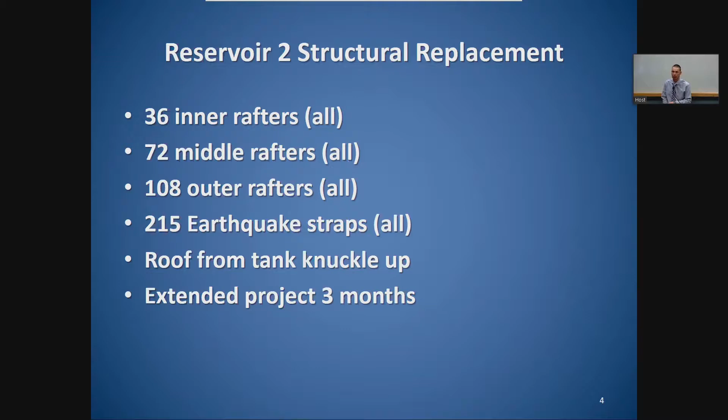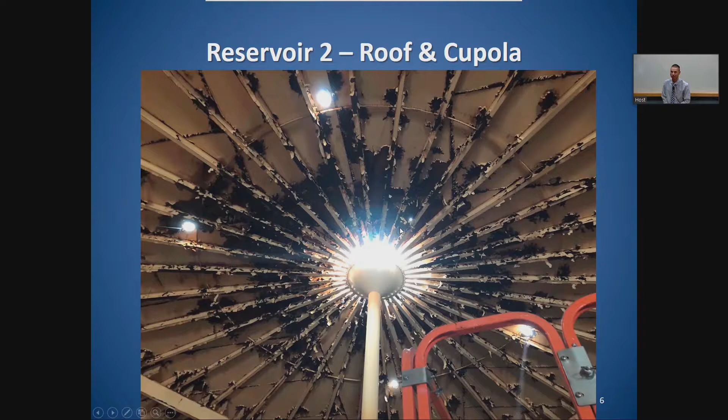So as I started on, the roof corrosion is very extensive. Focusing on the photo for a second, the very dark black is completely debonded, and the off-hue orange, more rust color, is actually getting ready to debond on this tank. As I touched many of those on the lift, it was falling off in pieces onto the floor. So the vast majority of the roof has failed. In fact, I would say over 80% of it, just from lack of coating, and also a corrosive environment from the way we used to operate our systems, but really the coating failure is the predominant fault.

And on that photo, I want to touch on this as well. The rafters themselves, and this was a big deal in Reservoir 2A too, had pre-drilled holes through the I-beams, and unfortunately that's a point of initial corrosion. No matter how hard you try, no matter what product you use, that's a conceivable point where corrosion can begin. In this tank, those locations, beyond the bolted connection, could each be honed out with a simple pencil or a knife and continue to make that hole bigger and bigger. There's not much holding those steel I-beams in that roof together anymore. With the future of this tank and the replacement, clearly we will not have any drilled holes in this tank, and I'll get to that in more detail in a minute.

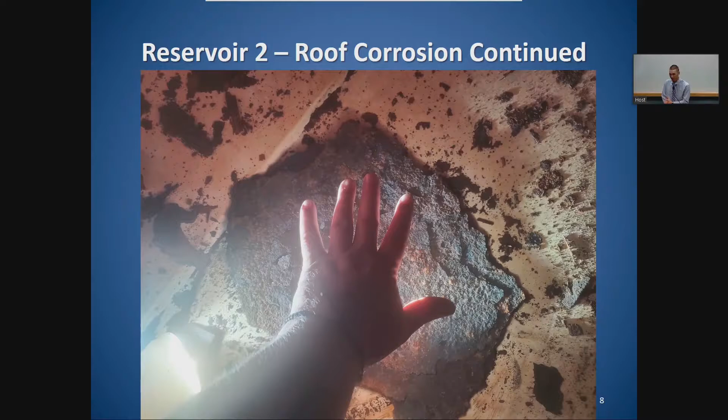So I have some examples physically in person if anybody wants to take a look at them. Some of these were on the floor, that size, so they'd actually fallen off the roof during the time of use. Beyond that, we obviously started knocking more and more off as we began work. But that was one that when the tank was brought offline and we made our first initial inspection, we found that was by and large the largest one we've seen.

So in addition to the rafters themselves, which run on top, the girders unfortunately have sustained significant damage as well, to the point of needing full replacement in this tank. They're often called bay beams - that may be a nomenclature thing if you've heard of that. Nonetheless, the girders themselves were a significant point of corrosion. In short, with the bolted connections, as we saw in Reservoir 2 that I brought in, where that roof rafter makes connection to that girder is an initial point of corrosion.

No matter what we do, we can't completely stop it. With the replacement of these girders and the rafters themselves, that will be a welded connection, which will negate that potential need for corrosion. Additionally, and we'll get into another photo in a little bit, the rafter clips can be seen on one of the girders, one of the rafters I brought in.

Almost all failed in this tank. So the rafter clip itself creates an airspace between the girder to allow that to dry out and ventilate. What happens when that rafter slams down on top of it, not only does it damage the coating, scratches it right off, but it also creates an entire corrosion cell in and of itself. And that was a significant problem in this tank in comparison to Reservoir 2A. The girders themselves were holding up almost every rafter in that tank, and the clips were non-existent. They were gone.

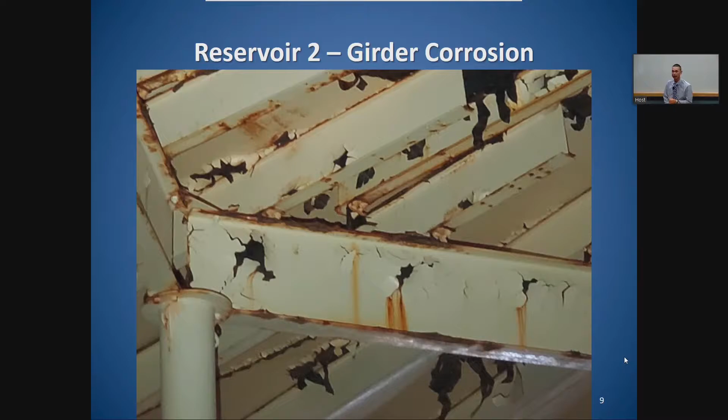Patrick, I'm not sure, was the construction different in tank 2A than tank 2?

Unfortunately, no. The big difference is between the coating of tank 2 and 2A, the coating contractor actually died. He crashed his plane in the Sierras, and the company just got in and got out. So the coating on Reservoir 2 was done very hastily. Additionally, inspection was limited at that time. We didn't have a full-time coating inspector on site. They kind of did stop-in checks. So they slammed it out, got in and got out. And that's a significant difference, we actually had an ownership individual who was there for the initial work.

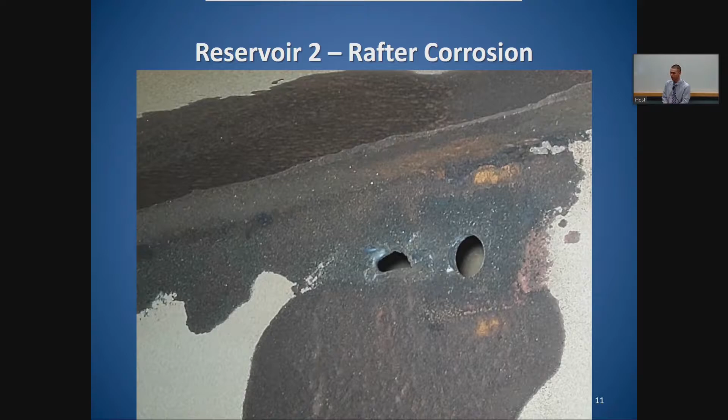So another big challenge within this tank that forced us into a full replacement of the roof rafters was actually the knife edging that occurred. So we've had, obviously, metal loss in this photo, and this has actually been blasted. That's why it's more of a gray color itself, not a rust color. That knife edge is impossible to coat. No matter what paint suppliers say, no matter what product they're pushing, you can't do it. In fact, the new tank designs today, the I-beams themselves are completely rolled.

These are all chamfered I-beams, so they have a little bit of an edge to them. All the new tanks today and the new steel we put in will all be rolled on that I-beam. That doesn't necessarily mean it's a perfect environment, because it's not ever going to be fully coated properly. It's very much a challenge with any I-beam, but it's going to be significantly better than this.

With that knife edge being as straight as it is, and the lower I-beam rafter I brought in today, it shows very clearly how jagged and rough that can get. In Reservoir 2A, we had maybe 20 to a maximum of 30 of these that we left in this general condition. We were able to coat with a very solid state, meaning we were able to get a good coating on it, so we were able to leave them.

In Reservoir 2, they are so jagged on both sides—not just the side that we blasted, but the other side of that I-beam—that they are virtually uncoatable to be able to extend the useful life of those rafters.

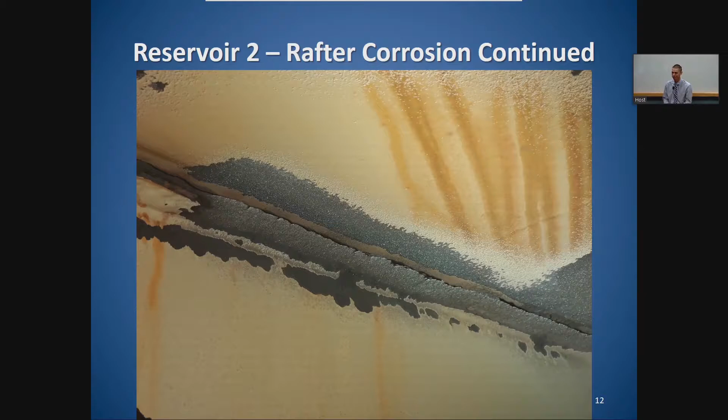The rafter clip is missing in this photo, and the real reason I showed this photo, aside from the knife edge, is the girder and the delamination there, which is amazing because it was actually bent. It's almost bending the girder from all the stress and loading taken, not just from the roof, but the added loading of the rafter moving back and forth, as I mentioned with thermal expansion.

And then we got into the roof. As if the girders weren't enough, the rafters weren't enough. We started doing some initial inspection blasting, and throughout the day—probably three to four days into it—basically every panel we touched, we were punching holes through it, just doing the same blasting they would do for preparing it to paint.

It's more or less certain areas we think are possible limitations for being able to repair or coat. We have them go in and spot check, and with our coating inspector, we point out areas and they attack them. Unfortunately, as we got into this, we started to realize something even more significant than we hadn't noticed with the rafters up to this point.

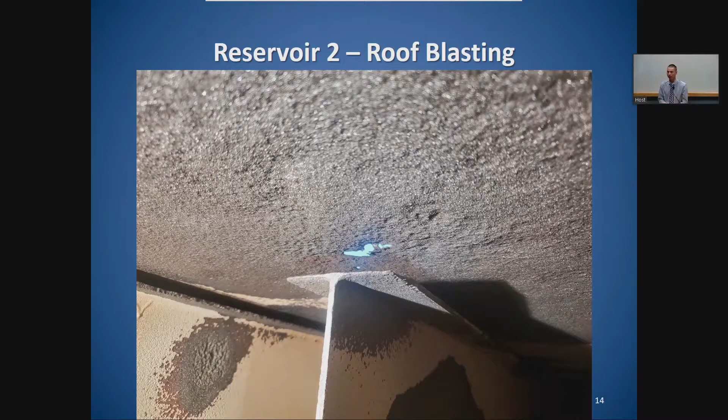As the holes continued to increase and also to increase in size, we started to become very leery of what actually occurred with the initial coating.

Reservoir 2A, falling back in time a little bit, received a top but very thin layer of coating on top of the rafters. So basically sandwiched between the roof and the top of the rafter, there was coating not only on the roof, but also on the rafter.

What we very quickly realized is that there was no coating. It was a shop primer red, actually, which is what they ship from Chicago Bridge and Iron to wherever they're building the structure. Unfortunately, as we got further into it, every single rafter that we removed and blasted underneath, that exact hole, or bigger, occurred in every single roof sheet that we had.

So not only from the photos before that you may have seen, because we were working in between to start with and showing you basically in between the rafters—that was actually not the worst part of it. We didn't do a UT thickness on this. I don't really think it's necessary on the roof, because very clearly from the pieces of the roof that I had missing, we're well over a 16th gone.

In addition, trying to patch this is insurmountable. The challenge with patching a single hole is one thing, but patching numerous holes is a whole other conversation, because unfortunately there will be no lap weld on the inside and outside that'll be able to prevent corrosion. You'd have to cut in a sheet, cut out a portion, weld inside, weld outside. By the time you factor in all the material, labor, and frankly getting the steel—as challenging in that size as in the smaller sheets—and even cutting it on site is a very expensive cost. It doesn't really give us a great product moving forward, something we're able to coat and put quality to, and be able to make another 50, 60, 100 years out of whatever we touch.

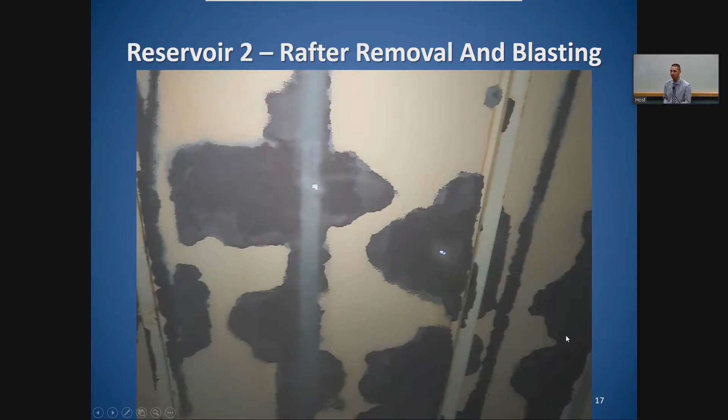As part of this, we need some Reservoir 2 coating inspection work. MCS has been working closely with the district up to this point. We've done a little construction grouping with them on the steel installation side, as well as painting inspection because of their background. It's been immensely helpful for the district to have them on board, and their expertise has gone way above and beyond what we anticipated. Because of that coating inspection, we'll be able to extend the life of both facilities, not just 2A and the roof replacement at Reservoir 2, but it will also speak volumes in 15 years when we take this tank offline for a physical inspection and, hopefully, a recoating.

These low volatile organic compound paints, as I'll get into, were never really designed to make it 15 to 20 years. They were a first attempt. Around the early 2000s, when 11 of our 34 tanks were built, there was an NSF rule at that time and paint manufacturers were scrambling. We unfortunately inherited a really bad batch of paint, politely put, with limited inspection, which really caused a lot of the challenges we've had at this tank and others the district owns.

With the recoating of this tank and the new paints that have been proven over the last decade, within 15 to 20 years we should see a tank much like we did at Bass Lake. We actually did a recoating project there, and we'll be doing the second tank next year. I had zero structural replacement there, not a single piece of metal was replaced. That was at the tail end of the low organic compound timeframe, 2005 for Bass Lake tank number 1, 2007-8 for the second tank. Those were at the tail end, but the early 2000s were really subjected to these poor paints.

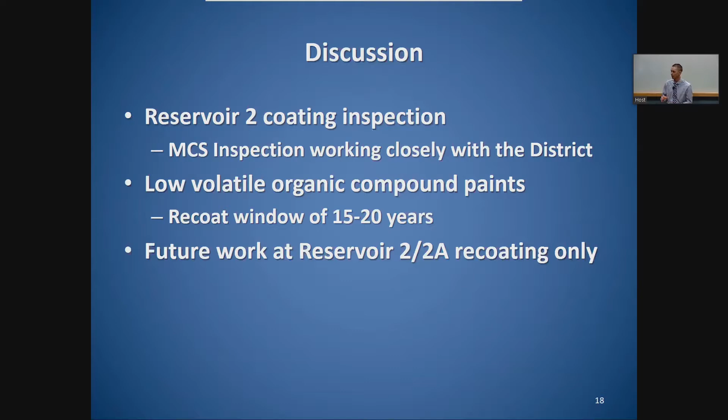Next slide, please. Patrick, the last time these were coated and we had the issue with the contractor, was there an outside inspection service that we used on those as well? Which one are you speaking to? When we had done this 15 years ago or whenever, and the contractor passed away, were we using an outside coating inspector? It sounds like they didn't.

They weren't full-time. Back in that timeframe, coating inspection was certainly not what it is today. We have somebody out there the entire time they're painting, because the big challenge back then was the preparation of the site beforehand. Each day you have your dehumidification equipment, your blasting equipment, your painting equipment, and that wasn't necessarily checked to the extent that it is today. That's one of the big differences in time that we've made.

The cost of inspection is really finite if you look at the grand scale of the project, but it's something we can't live without moving forward. I can't tell you how many times we've had coating inspectors catch things on projects, not just MCS, but other coating inspectors, catch things that even the contractor missed. That added bit of detail is invaluable for the district moving forward. Again, it's a really small cost in the grand scheme of this project, but even on smaller projects, it's worth every penny because catching and finding problems beforehand alleviates issues in the long term. Yeah, absolutely.

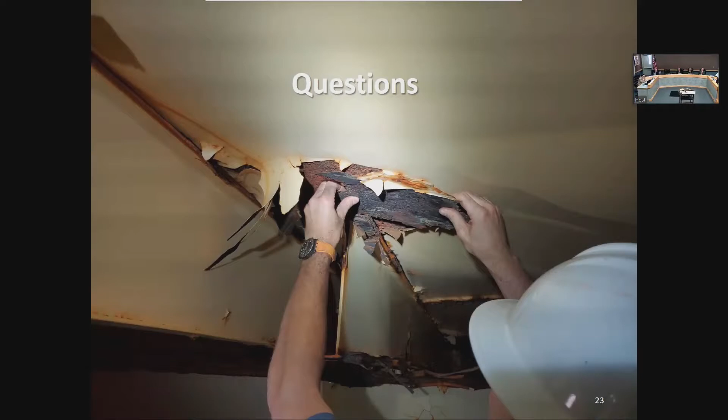In deference to spending $2.6 million, was there any thought at all about just replacing this tank with a concrete tank, and what the cost would be with that? I'm not suggesting we should do that, but I just think, did we explore that possibility?

Absolutely. So there are some limitations there, Director Osborne. We looked at 2 other alternatives. One alternative was to go back with an aluminum dome, which has been very successful and is a proven industry method. In fact, we did that at Reservoir 3.

Jiffy Pop. Jiffy Pop, yes, that's accurate. Geodesic dome, anyone?

No, okay. We did examine that as an option. That was actually the first option we went towards because the shell itself, other than those 4 stiffeners, is actually in great shape. And the floor is in great shape. So we were trying to save the structure that we had.

Unfortunately, with the cost of aluminum and the timing in getting that aluminum here so we can have the tank back in service, it's a challenge only having 1 tank. Reservoir 2 kind of feeds the head of the dragon. It feeds EDM 1 and EDM 2, and that's your collection point for Reservoir A and Reservoir 1 water treatment plants. When Reservoir 1 goes into backwash, it's a challenge for Reservoir A to get enough water in there with only 5.75 million gallons to utilize. I know that sounds strange, but it is very much a difficulty we are faced with in the summer.

It was very difficult during the fire situations, everything going on this year. But that aside, trying to get the tank back in service by May, the cost of just doing the aluminum dome, irrespective of the labor-intensive side of it, we're looking at about $3.5 million plus the labor just to get the aluminum dome in. So unfortunately, the timing is not going to work out to jump in line in that process.